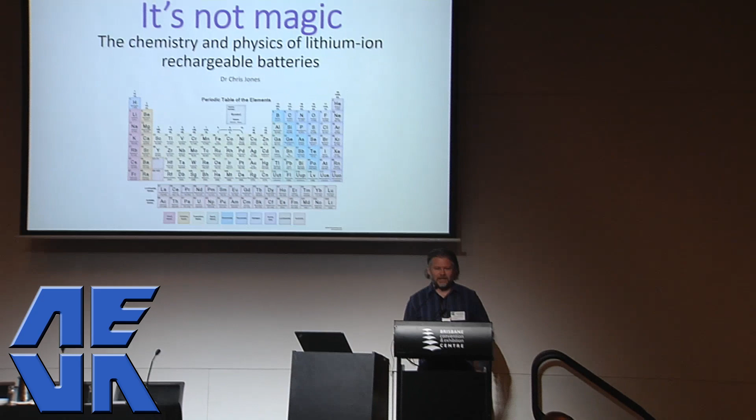But a lot of what I do in my job is scan the literature on battery technology, what's going on in the peer-reviewed scientific world, and then trying to sort of distill that into how we can apply that to battery technology in the future. So this presentation is kind of like a distillation of all of that information I've been gleaning, and if I can share it with a wider community, then so much the better. So yes, the chemistry and physics of lithium-ion rechargeable batteries.

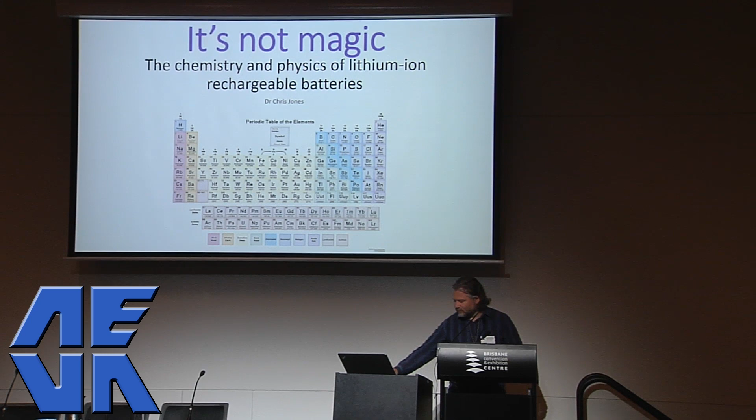So I'm going to talk science here. So it contains chemistry, maths, physics, engineering, materials science. Certain MPs and senators don't like that kind of stuff, with the exception of Tim, obviously. But this stuff's real.

And nomenclature, I'm talking about the cell. So the cell is the fundamental unit of a battery. It is the single 3.7 or 3.2 volt unit that stores energy. As soon as you put more than one of these in series or in parallel, you've now got a battery. And so I've put some pictures up there of examples of what I mean by a cell, what I mean by a battery or a module, and then the pack. And the pack refers to the entire enclosure and all of the safety equipment contained therein.

So you'll often hear people talking about energy density. You also need to remember, are they talking about it at the cell level or are they talking about it at the pack level? Because obviously at the pack level the energy density will decrease. So that's just some examples of prismatic cells over there on the left, pouch cells in the middle, and cylindrical cells on the right.

All chemical reactions involve the transfer of electrons. If electrons aren't moving, there's no chemistry happening. So the basic principle of an electrochemical cell is harnessing the movement of those electrons as the chemical reaction happens. Now you could put all of those ingredients in the one flask and shake it up, and the same chemistry is still going to happen. You just won't be able to harness the electrons.

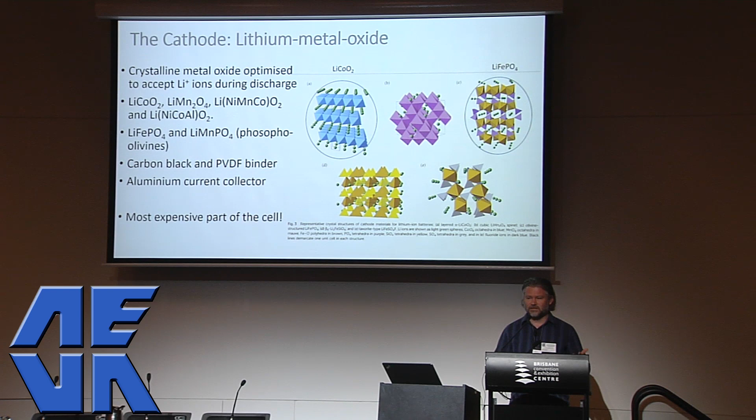The electrolyte, which is the liquid that joins the anode and the cathode, that's what dissolves the lithium ions. Typically, the lithium ion source is lithium hexafluorophosphate. It's chosen because it dissolves in this unique ethylene carbonate-based solvent that is the electrolyte.

Now, some work by Jeff Dahn over at Dalhousie University in Canada found that if you put fluorinated versions of this solvent in the mix, it's got far better heat tolerance, and you won't get decomposition of the electrolyte. What is interesting is that when the electrolyte decomposes, it forms carbon dioxide gas and it builds up pressure.

And if you've got radio-controlled cars and you've got your pouch cells, they might swell up and puff. That's largely carbon dioxide being caused by the decomposition of the electrolyte. It's highly flammable, and usually when there's a lithium-ion battery fire, it's the electrolyte that's burning in a hurry.

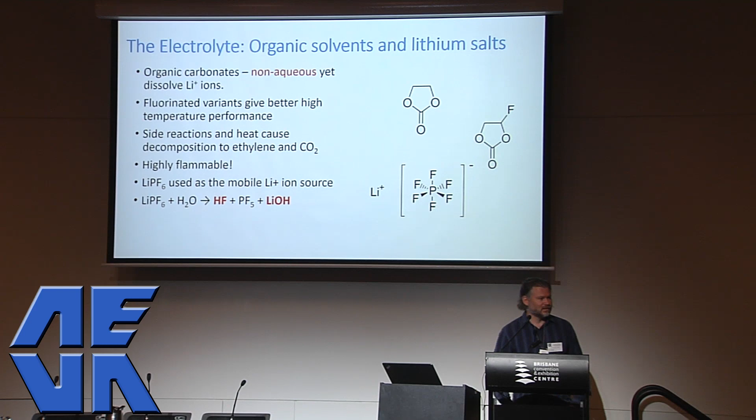The anode, that's the negative end. It's typically made of copper, copper being a good conductor, but also rather heavy. Graphite is typically coated on with PVDF as a binder, and that serves as the intercalation matrix for the lithium ions during charge.

What's interesting is that as soon as the lithium ions are pushed into the anode of the cell, they form what's called the solid electrolyte interface, the SEI. And it's a whole bunch of crud, basically. These crystalline versions of lithium carbonate, lithium fluoride, all these lithium salts form a mud that kind of coats the

surface of the anode. But it's kind of a blessing in disguise because that actually protects that structure from collapsing, so it's able to maintain its integrity for longer. So although it does slow down the passage of ions, it actually retains them better.

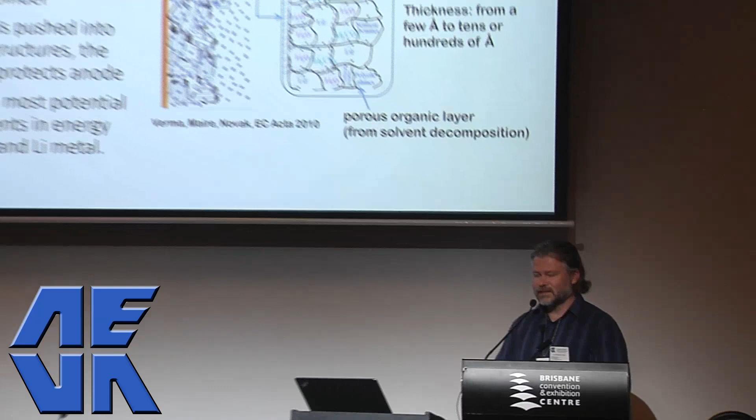Really interesting thing about the anode is that the greatest gains we'll ever get in energy density will come from improvements at the anode. So things like lithium sulfur, lithium metal, using direct lithium metal as the anode has the highest energy density. You can store the most charge on that plate. The downside, of course, being a whole bunch of other side reactions that complicate the matter and basically result in a short-lived battery. But researchers are working on it.

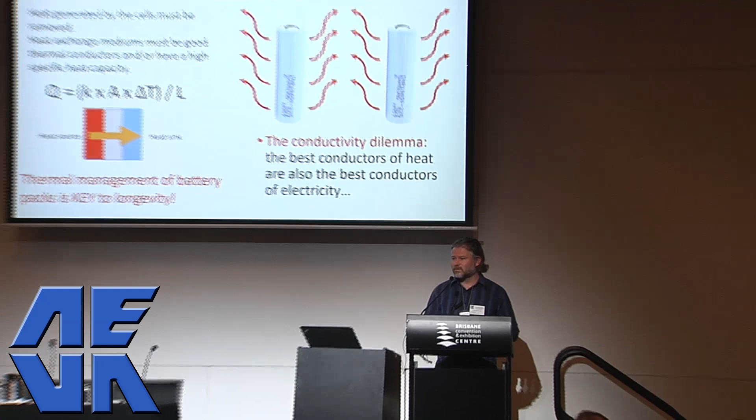So, thermal management, this is a bit more physics. Basically, the area of the thing that you're passing heat through is going to be critical. The thickness of the thing that you're passing the heat through, and of course the K in that equation there is the thermal conductivity of the material. So by way of comparison, copper has a thermal conductivity of about 400 watts per metre Kelvin, aluminium 200 watts per metre Kelvin, plastic about 0.2, 0.4. A really, really thermally conductive epoxy will be about 1.

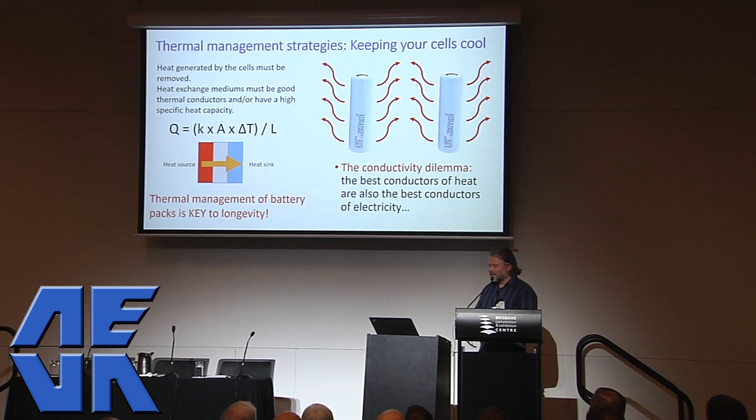So the reason why I mention plastics is because they don't conduct electricity, which is a good thing. If you're going to be trying to hold a cooling plate up against a cell, you don't want it to be conductive because it will potentially short the cell. So Tesla battery packs have very good thermal management systems, but they still have this rubbery kind of stuff between the cooling channel and the cells that is electrically insulating but moderately thermally conductive. And it's never as good as we'd like it to be, but them's the laws of physics.

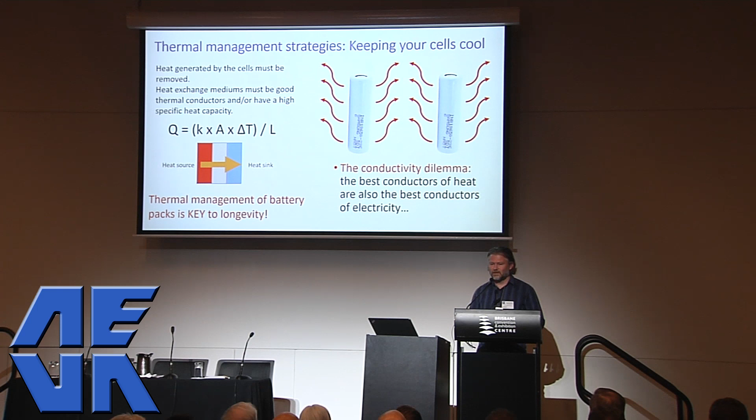So, as I said, the key to battery longevity is going to be maintaining it in that really sweet sort of 20 to 25 degree spot. If they're too cold, the chemistry is sluggish because the internal resistance increases. If it's too hot, you risk putting the cell into a thermal runaway and you've got a big fire on your hands.

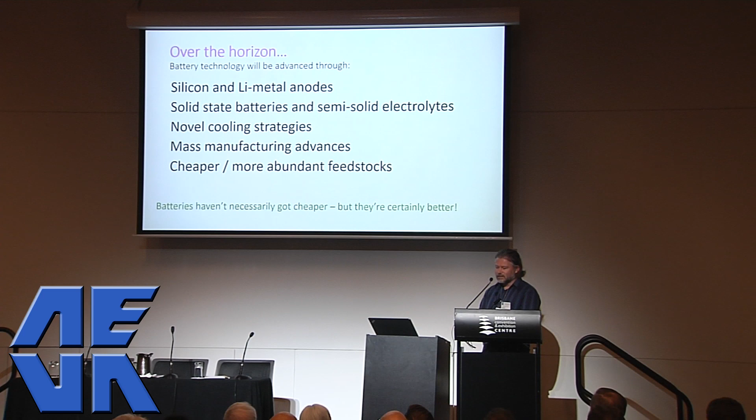There are some novel cooling strategies out there, including immersion of battery packs in dielectric fluids like Novec and other fluorinated compounds. They don't react with anything else, but they're also pretty ordinary at absorbing heat, so swings and roundabouts. The other advances, of course, have been being able to manufacture cells cheaply and more reliably. That's been a big driver of the cost reductions. And we're also looking at cheaper and more abundant feedstocks, so limiting the amount of cobalt that goes into the metal oxide layers of the cathode, for example.

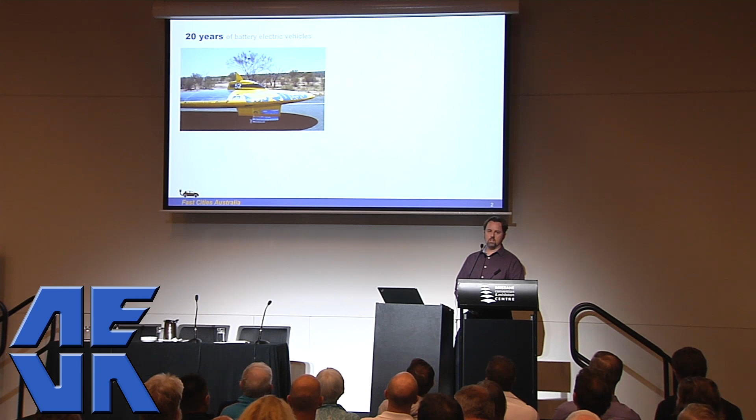So rather than introducing myself, let me tell you about the last 20 years. 1998, I was a university student at UQ, and that was the year that we ordered our very first lithium-ion battery pack for the Sunshark solar car. So 20 years ago today. And that was, to my knowledge, one of the very first applications of lithium-ion batteries in an electric vehicle anywhere in the world. We weren't the first, but there were not many around then. And obviously Tritium, which many of you would have heard of, the fast charging company, also emerged from this project. So it goes back a long way, but a pretty significant start there.

Fast forward 5 years, it's now 2003, and I'm doing a PhD along with a bunch of other people at the University of Queensland. And this car, the Ultra Commuter, was the first design study that we know of in Australia to try and make a practical electric car using the latest technologies, including lithium-ion batteries. The charging of this car, of course, was very prototypical, carefully controlled, certainly not fast, not even slow. Terrifying would be the best word for it. But there's a little bit of progress here. So that was 5 years later.

Fast forward another 5 years. It's 2008. And there's a young Australian engineer driving that Tesla Roadster across the Bay Bridge in California, and that car had just entered production. So the Roadster was the first car in the world that demonstrated the full potential of lithium-ion technology. This car had 400 kilometres of real-world range. I know it because I proved it. It didn't have fast charging though. It had AC charging at up to about 20 kilowatts. But it was certainly a sign of things to come, and we know what happened with Tesla after that.

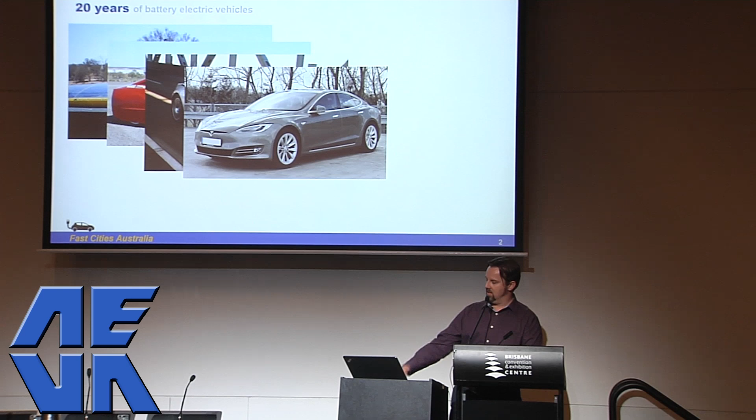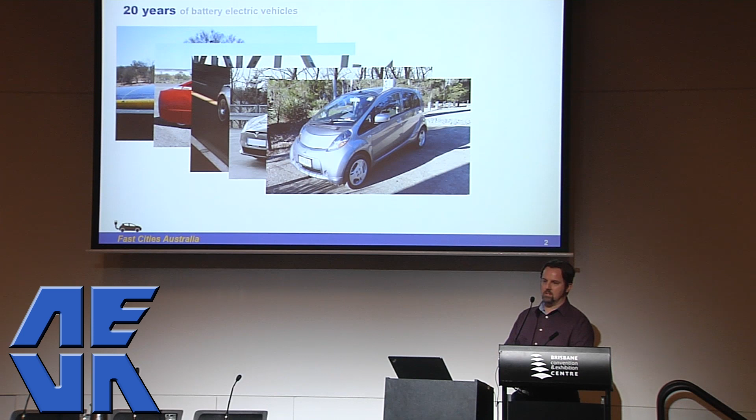Fast forward another 5 years. So now it's 2013. I'm back in Australia now. Tesla has just entered production of the Model S the year before, and it's a really nice car, I've got to say, arguably their best product. But a very expensive car, especially in Australia. And I would have loved to buy one, but I couldn't afford it. So I bought an i-MiEV instead. Also a lithium-ion battery vehicle, not the same range as the Model S, but it did have fast charging, 50 kilowatts DC fast charging. So along with the Nissan Leaf and the Tesla Model S, some of the very first EV products in the world that had fast charging capability, although at a slowish rate relative to what we're looking at today.

Fast forward 3 years now, so now it's 2016. And Tesla's making the Model X, which was the first electric SUV in the world. It was also all-wheel drive, it could also tow, and it of course had fast charging as well. And by this stage in Australia, we were starting to see a bit of a supercharger fast charging network being built out. But again, a very, very expensive car, even more expensive than the Model S. So we bought an Outlander. It could do everything that a Model X could do, and arguably do it better, except that it did burn a bit of fuel. So unfortunately there wasn't a fast charge option available to us at that time, but that basically brings my personal journey to where I am today. So that's 20 years of EV experience that I've had so far, and as you can see, fast charging has come into the mix, but some products have it, some products don't. We're not quite there yet.

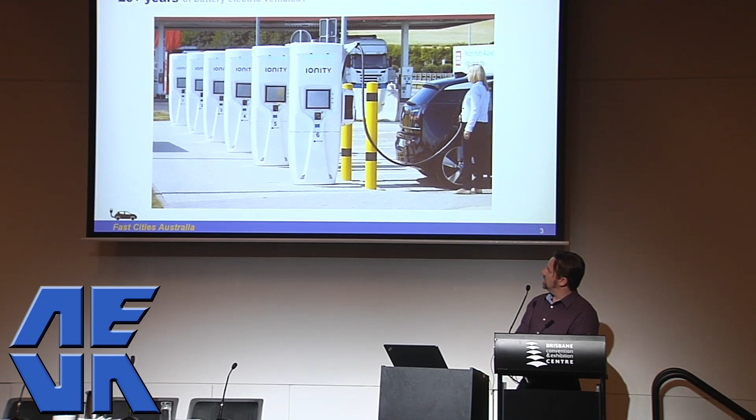This photo is a photo from Germany. It's the very first ultra-fast charging site built in the world. It was commissioned in March this year, and the network there is Ionity, actually founded by the 3 big German car companies, and with the charger supplied by Tritium. So what a coup for them. And so this opportunity, if you like, was what catalysed the formation of Fast Cities here in Australia, to think about how can we provide this level of infrastructure, you know, the very top end, top quality infrastructure, so there's no limits to EV uptake going forward.

If you're driving a top of the line electric car, and for this example, I've assumed it's got a 100 kilowatt hour battery, just so you know the assumption behind it. If you're driving your top of the line electric car and you want to do a long trip using ultra-fast charging, this is what it's going to look like.

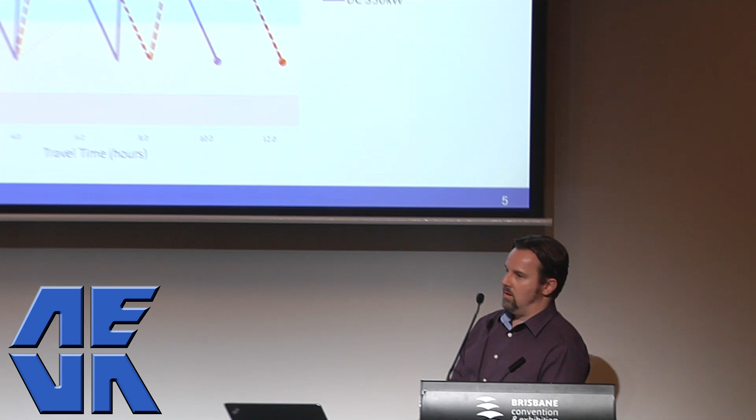What happens if you don't build a top-of-the-line ultra-fast charger network? Then you get these other options. The red one is basically equivalent to the Queensland Super Highway or the network in Western Australia with 50 kilowatt chargers. So it's still pretty good. I mean, let's not knock it. It's a great starting point. But if you look into the details there, you'll see after the first charge, you've lost an hour. And by the end of the trip, you've actually lost 2 extra hours because your infrastructure isn't fast enough.

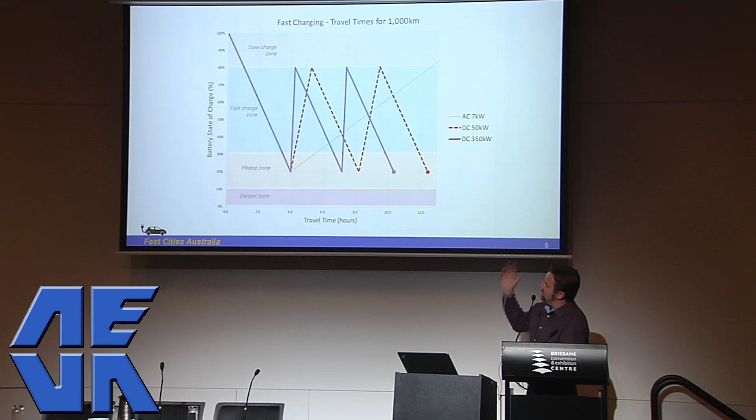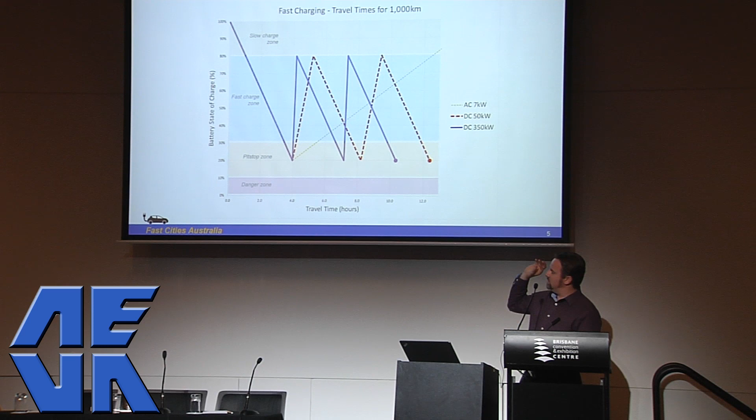And dare I suggest you try to drive from Brisbane to Sydney, say, with AC charging only. The green line is what that would look like. So, come back tomorrow if you want to keep going. So when we talk about ultra-fast charging, we know it's top-of-the-line equipment. But the whole point is we want to provide users the best possible experience. They don't have to do it if they don't want to, but we need to provision for it because the vehicles are getting better so quickly. We need to keep pace with this infrastructure.

So what I'm going to show you now is what 350 versus 50 kilowatts looks like on an engineering level, so you can really understand why it's such a big difference. So on the left there is the operating envelope for a 50 kilowatt DC charger. The axis at the bottom is DC current in amps, and the vertical axis is the DC voltage. And CHAdeMO, which we all know very well, was limited to 50 kilowatts, and that constitutes a 125 amp current limit, a 500 volt voltage limit, and then a 50 kilowatt power limit. So anytime I charge my i-MiEV from a fast charger, I'm stuck somewhere in that envelope. I can't go outside that envelope. It'll maybe consume 125 amps and it may rise up to 500, but it'll never go above 50 kilowatts.

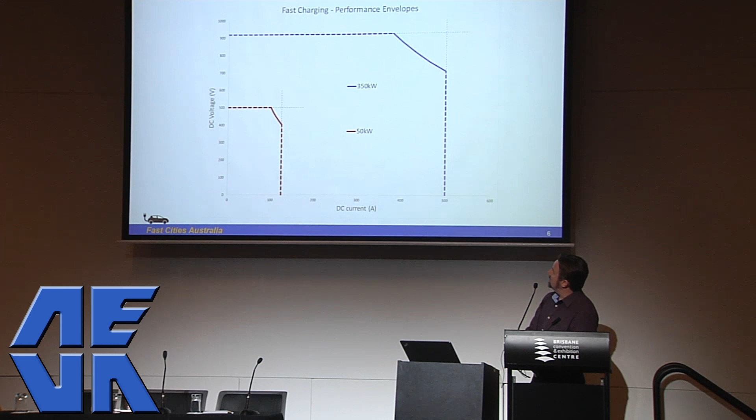On the right, the blue, is the ultra-fast charger. And this is indicative of the Tritium product, which I showed you installed in Germany. Now the current limit is 500 amps, and that's because the cable and the plug are liquid cooled. And the voltage limit is up now above 900 volts, and that's because automakers are starting to make vehicles that have battery voltages that high, and the power limit is 350 kilowatts. And you can see it's a massive envelope compared to what we had before. That's a world of opportunity right there.

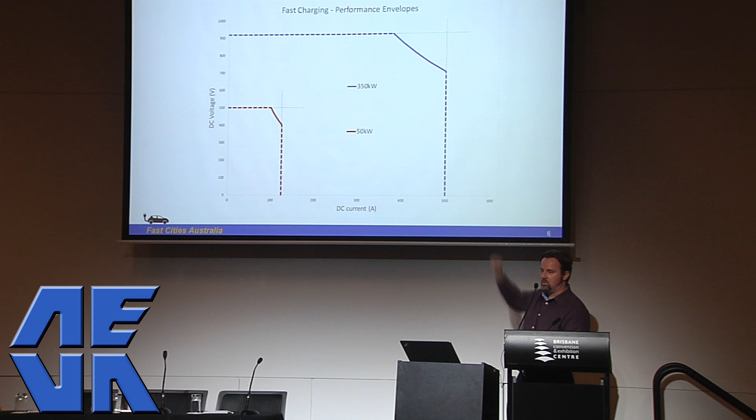Basically, any production car that's coming to market for the foreseeable future will be able to operate somewhere in that space. And if your car isn't capable of taking the full 350 kilowatts, well, that's fine. You can still find your natural operating point in that envelope. The key point is, by building the full envelope, we enable the full possibilities for all cars, all customers, and every possible type of trip they might want to do.

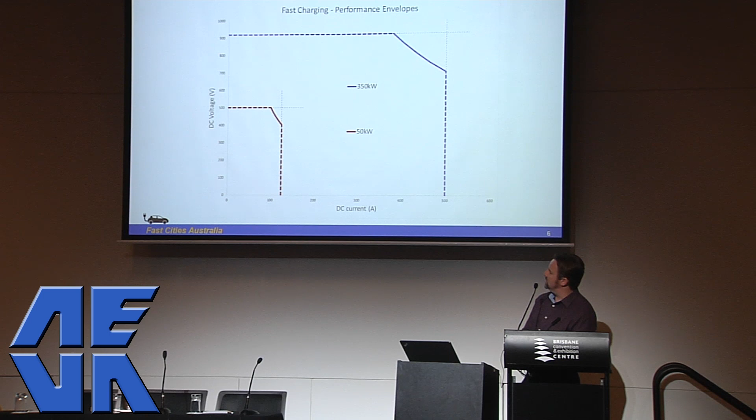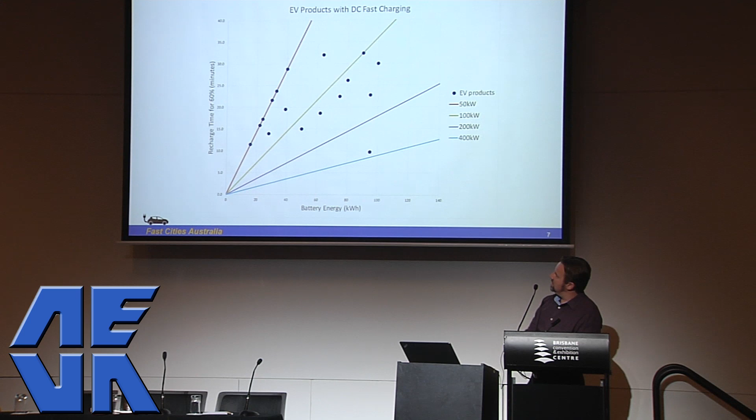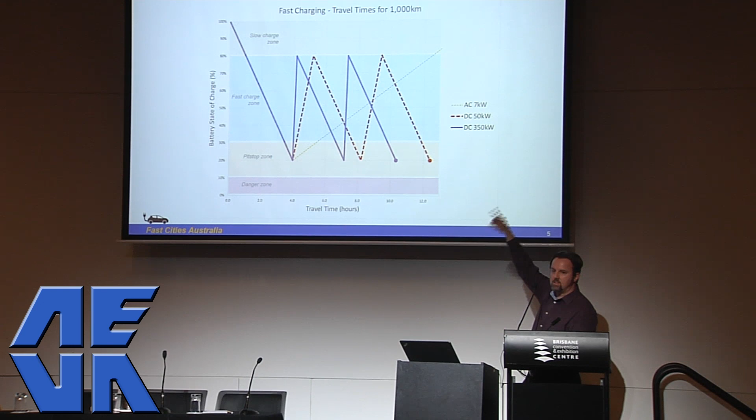So here's what the market looks like today in terms of products, our customers. On the bottom axis, we've got battery energy in kilowatt hours. On the vertical axis, we've got the time to do a recharge of 60% of the battery's capacity, as I showed you in that real world charging scenario there. We're actually cycling the battery about 60% in practice. And so that's what the recharge times look like. And then just to make this diagram really complicated, we've also got the power levels, those diagonal lines.

So if I just start down the bottom here, there's my i-MiEV down the bottom. Now for a car that's 6 years old, we'll forgive it, all right? It's the underdog here, but it was a long time ago now. As we move up this line, the 50 kilowatt line, we start picking up other products like the old Nissan Leaf and now the new Nissan Leaf, and I forget what the others are, but there's still a couple of 50 kilowatt cars in the market today. Then we've got a couple here that are on the 70 kilowatt line. I think they're the Hyundai products.

And then over here we've got a couple that are around the 100 mark. So that includes the Teslas and the Jaguar and the Audi and the Mercedes and the new ones that are coming to market in the next few months. That one there I think is the Mercedes with 150 kilowatts DC charging. This one down here is the really exciting one. It's the exception to the rule today, but it's the exciting one. It's the sign of things to come. That is the Porsche Taycan Mission E, however you may know it.

A car with almost 100 kilowatt hours of battery and 350 kilowatts of charging capacity. So you can fill that car up in 10 minutes. It's astonishing, and that is the first production car coming to market that has validated that. Obviously most of these other cars can't take full advantage of 350 kilowatts today, but we've got to build for the future and also cater for all of those other products too. So that's what the marketplace looks like today, and that's why we are building a 350 kilowatt network, because we know these customers are going to be available today, but we also know what the future holds.